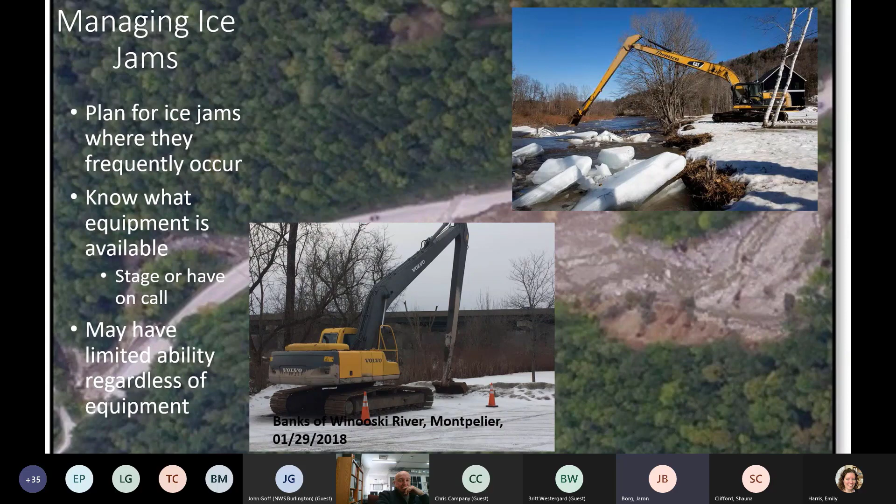So you need to be able to keep things in perspective. In both of these instances, we are looking at ice jams that span a number of miles and several million cubic yards of material. So in the instance of the Missisquoi River here on the left, it really is economically more feasible to move the infrastructure, the building in this case, adjacent to the ice jam rather than trying to mitigate the actual jamming of ice.

Another thing I did want to touch upon in this photo on the right is while this ice jam seems pretty stable here, there's actually not a whole lot of flow going through it, and it's actually going through another field adjacent to the river. So access to get to some of these areas can be very difficult and should be taken into account during those emergency response periods. Next slide.

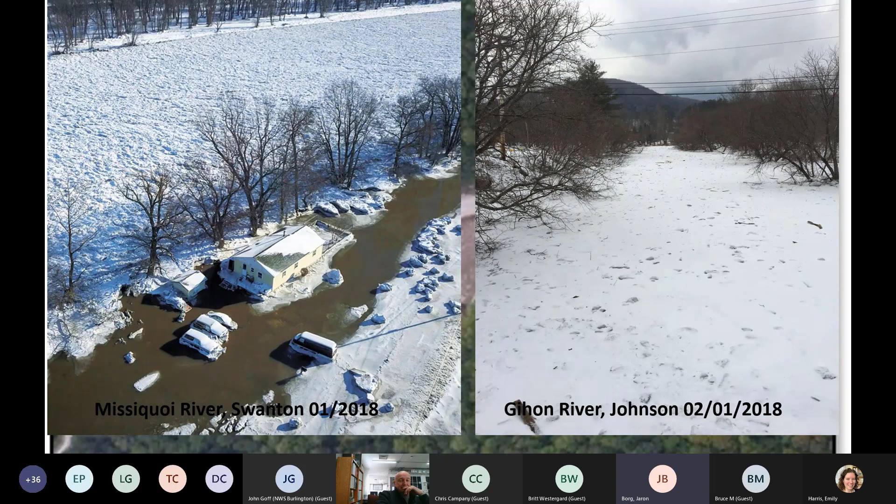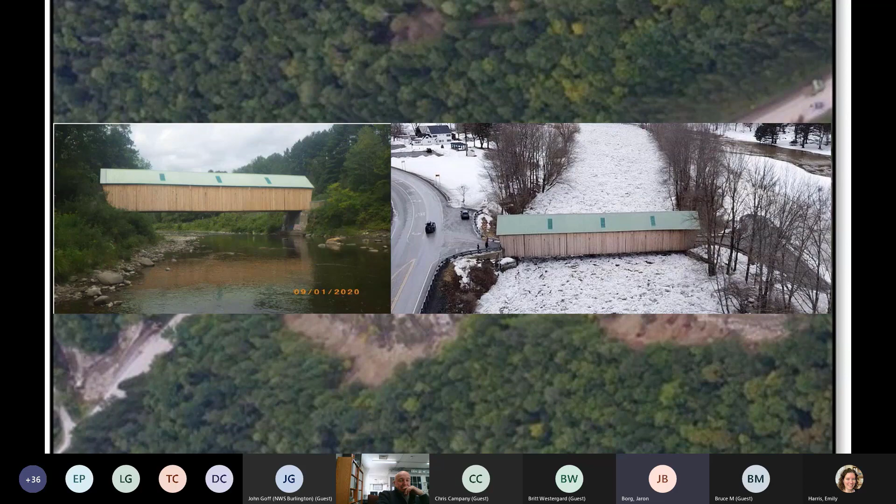Here's another one just demonstrating the scale of some of the projects that might result from ice jamming. This covered bridge in Woodstock is between 15 and 18 feet above water level. You see there on the left, and you can see on the right that almost all of that has been taken up by ice, and the river itself has shifted further right and is running through a field. So your ability to react and bring in equipment there can be severely limited, and finding better options for residents on the roadway to access as opposed to trying to excavate this material might be better efforts. Next slide.

It also should be noted that not all ice jams result in inundation flooding like we saw in the previous slides. Sometimes they can reduce channel capacity and increase erosive forces on stream banks, as was the case here, or the ice itself can act as abrasive and remove material.

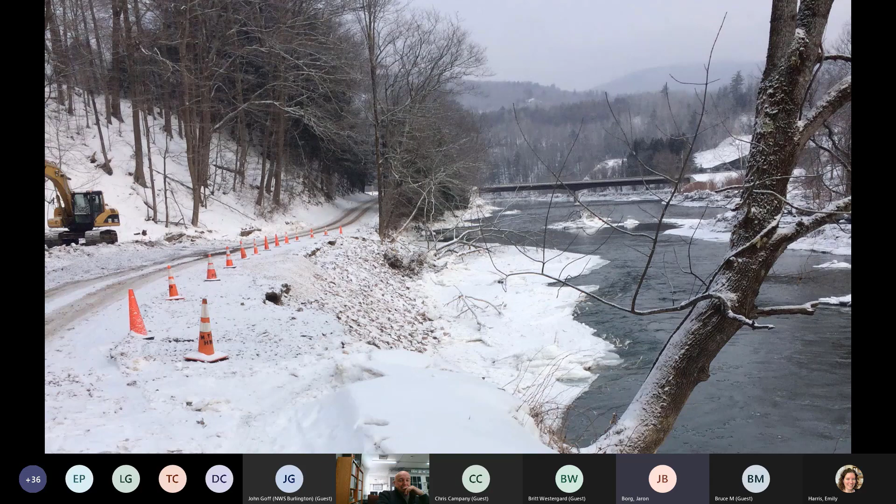In this instance, the town has gone in and done some emergency repair on a temporary basis to restore emergency services for individuals living on this roadway. In this case, work will need to be performed during the summer months to assure that it is more resilient than in its current state. It's a bit of a patch job. Next slide.

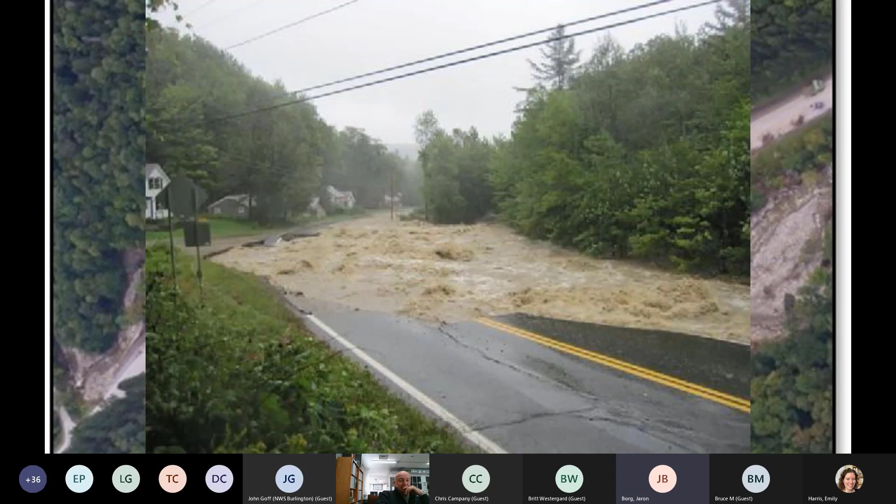So beyond ice jams, which is the topic of this, we do have flood threats during the spring, primarily associated with rain on snow events. So if you have a thunder shower in April, which was the case in 2019 with the tax day storm, you can have significant rises in water levels, and that will take out roadways. So in response to the flooding, we have several types of permits that the stream alteration section works with. Next slide.

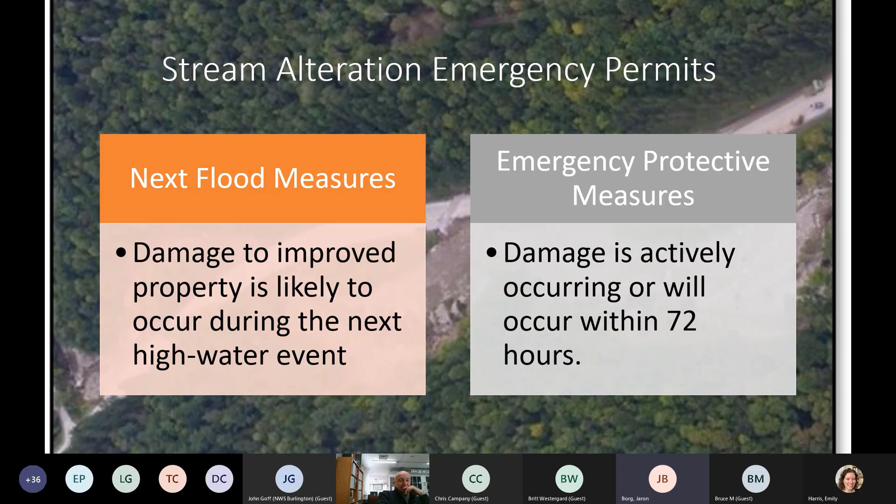And these are the two. We're going to focus primarily on the protective measures, but it is worth noting that next flood measure permits are essentially a typical permit process in a condensed time frame. So design, contractor bid, and build the project is how that works, whereas emergency protective measures are actions that can be taken on by the town themselves to make sure that public safety is the primary goal of these.

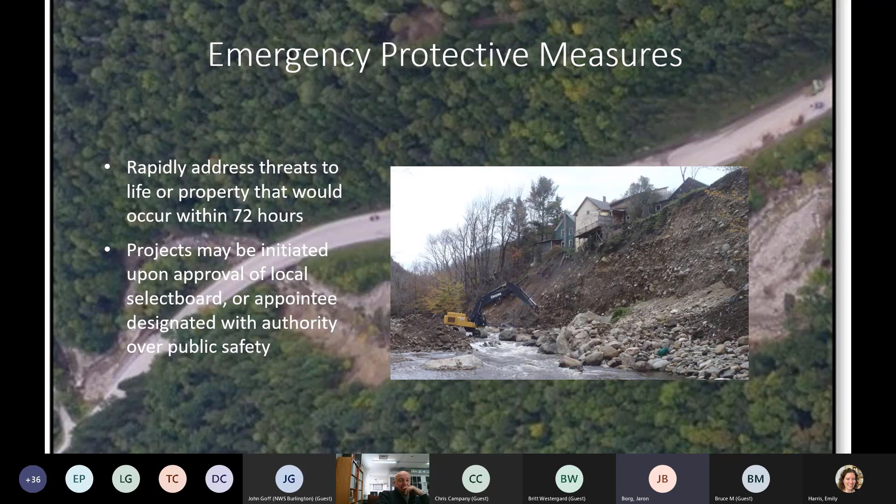So next slide. Emergency protective measures were developed in the aftermath of flooding in 2011, both in the Northwest adjacent to Lake Champlain and in response to Hurricane Irene, or Tropical Storm Irene, apologies. The emergency protective measures process can be summarized by this one slide. I realize there's a lot going on there, so I'm going to break it down a little further.

Municipality recognizes there's a threat to public safety and can approve taking actions to address that threat and notifies ANR of the actions being taken. The regional river management engineer or their delegate then either says the town may proceed and take those actions, or that they need to get down there to assure that it's done properly.

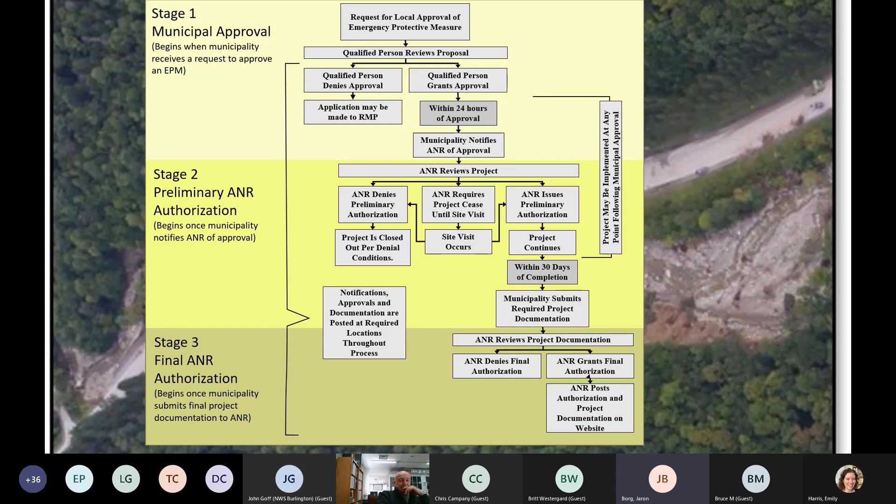And then finally, because these are done in a hasty fashion, both the town and the agency will work together to make sure that the permanent repairs meet implementation standards, which we'll touch upon a little bit here as far as the different types of work. If we go to the next slide.

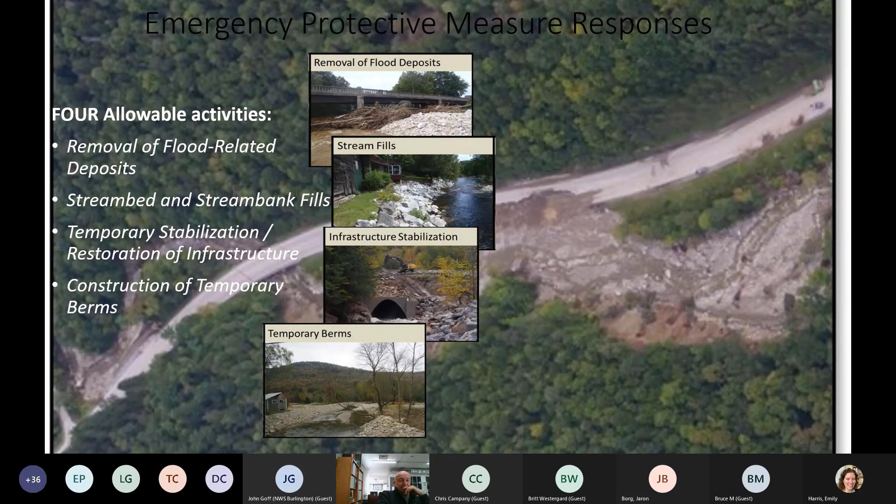And this one's going to disappear real quick. I apologize about that. So there are 4 types of projects. Oop, we can go to the next slide. It's a repeat for some reason.

So there are 4 types of projects that are allowable. There's removal of flood deposits, stream bed and bank fills, temporary protection of damaged infrastructure, and construction of temporary berms. So removal of flood deposits: essentially if a stream channel has been completely choked off by woody debris and sediment, material can be removed to restore capacity as necessary to alleviate any ongoing threats or damages.

In the case of stream bed and bank fills, those may be installed as long as they are not encroaching upon the pre-flood cross-section of the stream, and material should be appropriately sized. If it's not, it will be on a temporary basis until the appropriately sized material can be installed.

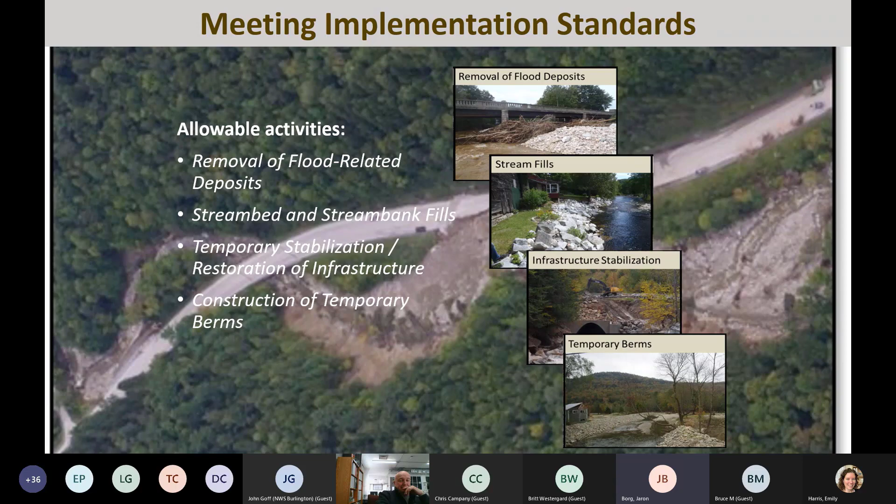Installation, or more importantly, temporary replacement of infrastructure, primarily crossing structures, is also allowable to maintain access for safety vehicles and maintain public safety. And then finally, temporary berms can be erected to protect infrastructure that is being damaged. However, those berms do need to be removed after the threat has lessened, and that can be a pretty big expense depending on the amount of work that is necessary. So we can go to the next slide here.

And then finally, just to touch upon what municipalities might want to look for before they start authorizing work. In this instance, I have 4 slides up here of damages that occurred as a result of a couple different floods. And apart from the roadway, the town might not want to participate in emergency protective actions because the flood has largely subsided. Really, the work that the town might want to take immediate action on is assuring that there is access for public safety for emergency services, and that would be restoring a 1-lane road in the 2 slides where there is road damage.